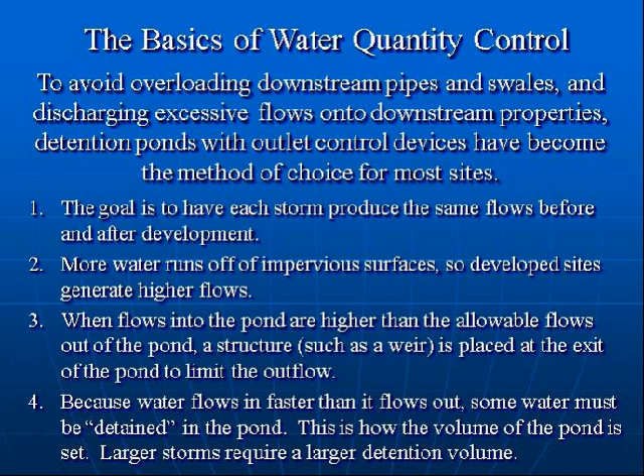So when water flows into a pond at higher than the allowable flow, the flow out has to be controlled, usually through a weir. It's placed at the exit to limit the outflow. Obviously, since water is flowing in faster than it flows out, you have to detain some of the water or store it in a pond to achieve the detention of water on a site so that the flows off site can be maintained.

Well, most engineers and hydrologists agree that about 95% of the water that falls on impervious surfaces will run off. Now, this absolutely is not true in a small, light rainfall in the summertime that's falling on hot asphalt. But overall, over the course of the year, engineers like to use a 0.95, which is 95%, or a 0.9 runoff factor for impervious surfaces. On landscaped areas that are developed, it's possible to get less than 50% runoff.

Lots of engineers like to use 30 or 35%. But by the time you compact soils and there's a relatively thin layer of manufactured soil underneath them, usually it's good to assume about 50% runs off. Now, in an undisturbed forest land, only about 20% of the water runs off. Sometimes it can be a lot less, depending on the type of land. And that runoff usually only occurs after the ground is saturated, because the leaf canopy and the organics on the floor can absorb some of that water.

Now, these are just general numbers, but they're useful for our discussion here to talk about why we need to control water quantity. So if an inch of rain falls in a forest, let's just say about 2/10 of an inch runs off. When you make that forest land pavement or rooftop, almost all of it runs off, which is about 5 times as much quantity, not rate of flow, quantity. Even in landscaped areas, it's 2 to 2.5 times the runoff as it was when the land was forested, let's say.

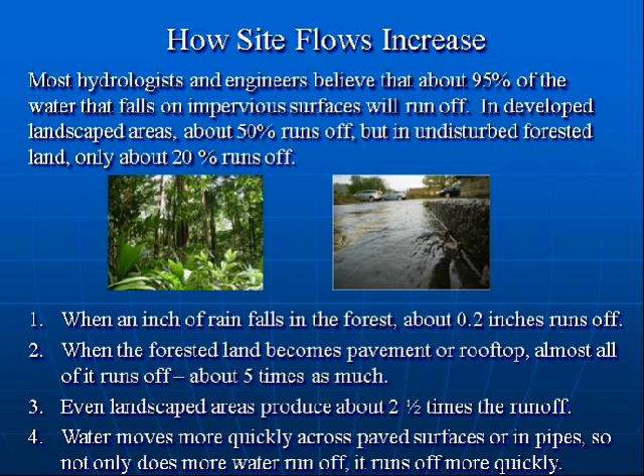Now, the other factor is that water moves more quickly in general across paved surfaces or in a pipe. So not only do you get more water running off, you get it faster. The water runs off faster and peaks sooner.

So this helps match pre-development flows. Usually a jurisdiction will say you need to match the 2-year, the 5-year, the 10-year. They pick some storms that they want to see the flows matched and kind of test your system to see if in various types of rainfalls the rate of flow, not quantity, this is the rate of flow in cubic feet per second, to see if you can match that flow coming off the site.

Well, a V-notch is a nice little tool, because obviously lower flows mean less detention, and less detention is a lower profile here on the weir, and so this can be used to match small storms and larger storms. Now, engineers use weirs, broad-crested weirs, sharp-crested weirs, Ogee weirs, circular orifices, all sorts of techniques to try to tune their release of water so that it remains the same.

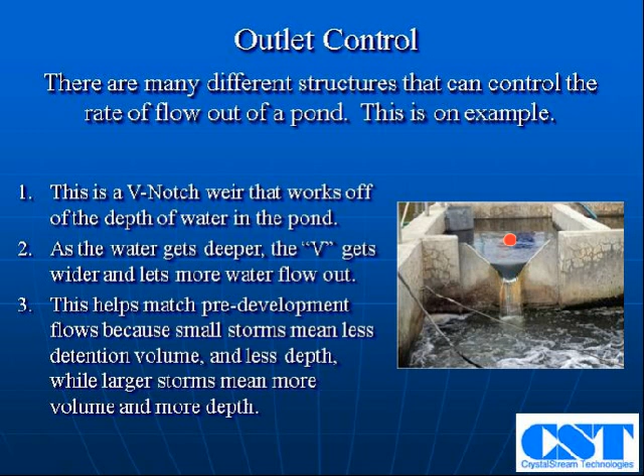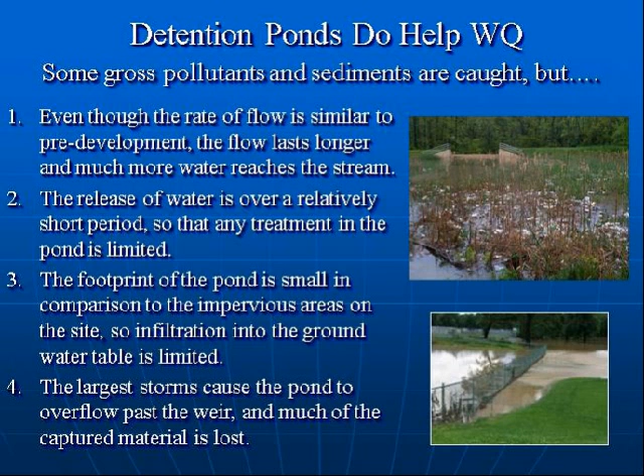One of the effects we found by putting devices below ponds, which is actually not where they belong, is that we still get a lot of material in our devices below the pond, and it's because when that pond does go to an overflow or gets into a large storm, it's pretty violent. The flows and the turbulence inside the pond are pretty violent, so we see a lot of material that gets washed out.

And that's not to say detention is not a good practice. In fact, it's hard to find a jurisdiction that does not require detention. There are very few exceptions to detaining the water, and it is justified to protect nearby properties. And you'll have downstream pipe systems that were sized for the existing flow, and so if you increase the rate of flow, you would overload the pipe system or the swales or ditches.

So, you really can't address water quantity problems with a detention pond. The quantity of water that runs off is exactly the same, pond or no pond. It just runs off more slowly. As a larger percentage of the property is developed across a watershed, these ponds peak and release at different times, and so more and more water reaches the stream.

As an engineer, we've spent a lot of time justifying the fact that at the 10-year storm or at the 5-year storm, at some particular point in time, we are not increasing the flooding on a stream at that point. But if everybody's releasing 3 to 5 times as much water into the stream in a watershed, you can bet that stream's going to receive more water overall during a storm event.

While the pre-development flows were smaller, they also took longer to reach the stream. And base flows from groundwater tables maintained some flows even during periods of little rainfall. You see this a lot up in the mountains. Sometimes I've seen springs in the mountains where there's so little mountain above the spring, I wonder how that flow is maintained even during the driest months. But there's a tremendous amount of storage capacity in soils, and water moves very slowly through this system.

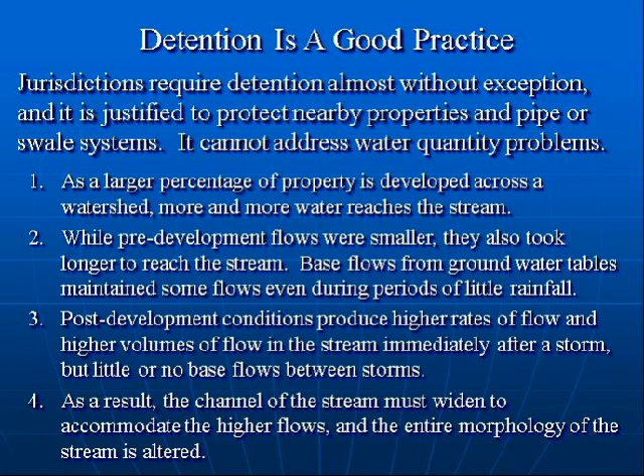As a result of these activities, the channel of the stream must widen to accommodate the higher flows. And so the whole morphology of the stream changes over time. If you work with some of the stream experts who are looking at channel bank erosion and at the outside curves of streams, they get pretty good at being able to estimate the amount of impervious in a basin just from the change in morphology on these streams.

So, the question is, when we're doing our water quality efforts, how can we help the water quantity problem? Well, even if we treat the water coming off of a site prior to detention to an extremely high level of quality, we use a separator, we use a filter, we would not help the quantity problem at all. The channel banks would still erode. The excess water going to the stream would still be there, and we would not have the groundwater recharge that we're looking for.

So, although this presents large engineering problems and some complexity in the design of a system, the first goal of a water quality plan must be to limit the flows of water off of the site, because that uncontrollable extra water that gets into a stream channel happens off of a site, can't be measured at the outflow point of a site, but it's a definite impact on the basin. Well, the best way that we know today to do that is through infiltration on the site or reuse on the site. And both of these techniques require some attention and some complexity.

If infiltration is possible, and that's one of the first levels of complexity, there's a lot of areas where infiltration is very slow and some areas where it's not possible at all. But if it is possible, it will help support the water table and stream base flows. Reuse for irrigation can also support infiltration to the groundwater below landscaped areas.

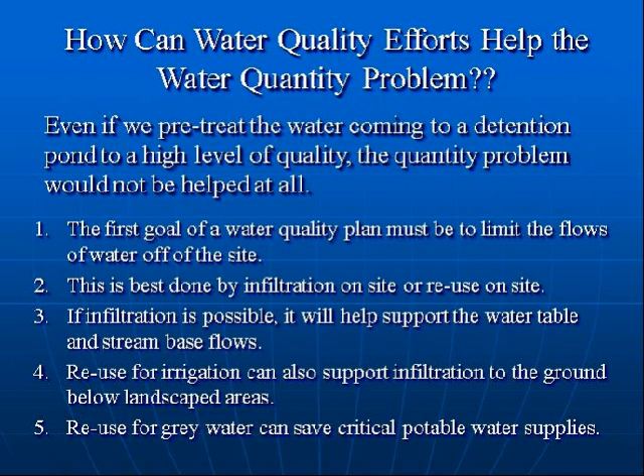And so a lot of times when we're looking at the complexity of getting a reuse system in place, we're not necessarily paying close attention to what may be saved in potable water supplies. So there's a positive effect there too.

Well, there's the challenges to this. I was speaking today with Earl Duckett, he's in the room here, and it's always good to have these holistic, overreaching ideas about, gosh, let's let less water flow off the site. Well, what are the challenges about on-site reuse or infiltration? Well, stormwater is dirty. We know that because we maintain almost 500 devices, and we've done over 5,000 clean-out operations,

and I had a report yesterday in the winter time from Highlands, North Carolina, very cold up there, of a live snake and a live bullfrog inside our device at Highlands. And it was interesting to me that they understood pretty well that it was cold outside and that the soil is still at 18 degrees Celsius or so up there, 60-ish, 65-ish inside our device, and they had found a warm spot literally to take up residence.

But stormwater is dirty, and by the way, our cleaner told the city folks that were up there to observe the cleaning that, hey, this just shows how good we clean up stormwater, and I thought it was kind of nice. Second thing is the challenge is rainfall is chaotic.

You just don't know. We have average yearly rainfall in Atlanta, 85 events a year, somewhere around 50 inches of rain if you look at the last 30 years, somewhere around 54 if you look at the last 50 years. You can do some predicting when you get to 30-year periods or 50-year periods. But really predicting, even in a storm you know is coming, the intensities and the depth of rainfall can vary widely just a few blocks apart.

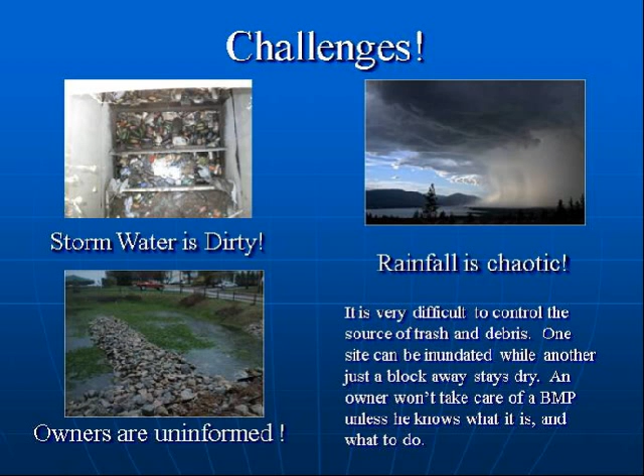So these challenges exist. If we're going to do something that's more complex than putting water in a pipe, putting it in a pond, that hopefully, in the old days, we would design so it wouldn't silt out, a pond that's going to be 10 years for maintenance or 5 years or 20 years, we just push the problem downstream. If we're going to do something more complex than that, we've got to go after these challenges.

Infiltration and reuse systems: every one of them has a very similar need. This includes manufactured filters. It includes cisterns. It includes distribution systems for landscape irrigation or into a toilet system, let's say, for flushing in a building. All the water that comes to these reuse systems should be free of excessive sediments and gross pollutants. You just can't deal with Dixie cups in a lawn sprinkler system.

So step one is to be sure that the gross pollutants and sediments have been removed from this water, and this is something that's been shown to be very easy to control. There are a lot of systems out there, mostly manufactured, but there are good sediment forebays and trash screens that have been able to control this type of material getting downstream.

A manufactured device, for example, may look something like this bottom picture down here, nothing more than a manhole or two on the site. So the impact for land use is very, very small. And this could be true of a public domain vault in the ground that was settling out sediments. It doesn't have to be a proprietary manufactured system. But one of the things I keep in mind is that every pond out there has been manufactured.

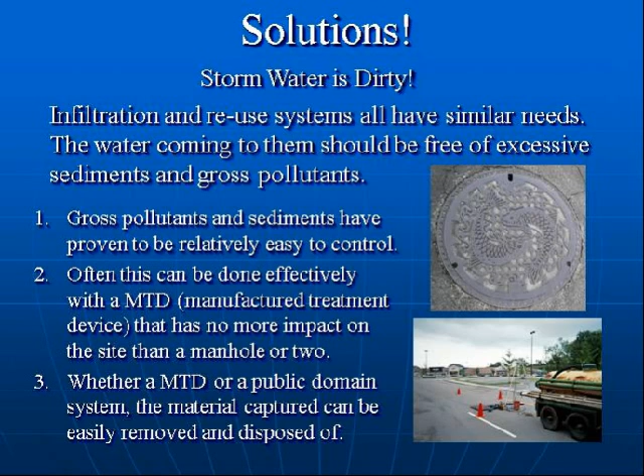Now, when you build a manufactured system and you try to get it approved, the first word out of a regulator's mouth, and it should be, is, hey, how are you going to get that thing clean? What does it cost? How often do you have to clean it? What's going to happen if it doesn't get clean? Those questions should be asked for every BMP, but when we talk about dirty water and getting it clean so it can be reused, these are the types of systems that you need up front to pre-treat this stuff.

The problem of chaotic rainfall is certainly not one we're going to solve, but one of the problems with infiltration is that it's very slow. We can design sand filters that will infiltrate relatively fast compared to regular soil. But no matter what the system is, compared to a 36-inch pipe going through a pond, it's awful slow. And that's something we have to deal with when we're looking for solutions.

Bioretention has limited storage before it overflows. Reuse systems have to hold enough water to provide for irrigation or other uses. One of the problems with irrigation cisterns is when it's raining, which is when you get your water, you don't need your water because it's raining. So you have to store that water. You may have to dispose of some water when you have a large storm coming and your cistern's already full.

So all of these problems of the chaotic nature of rainfall have to be addressed when you're dealing with this type of a system. Large storms can be a problem for infiltration or bioretention. So you want to have overflow from these systems that can be redirected to a reuse facility or detention.

Now, reuse can be a problem because of invert. We always talk about water. Everybody understands water goes downhill. Detention, it's pretty easy to get this water to a detention system, which is usually the low point on the site. Very few stormwater systems pump water up to detention. So planning in advance for overflow from infiltration or bioretention, what are you going to do with the water if it overflows?

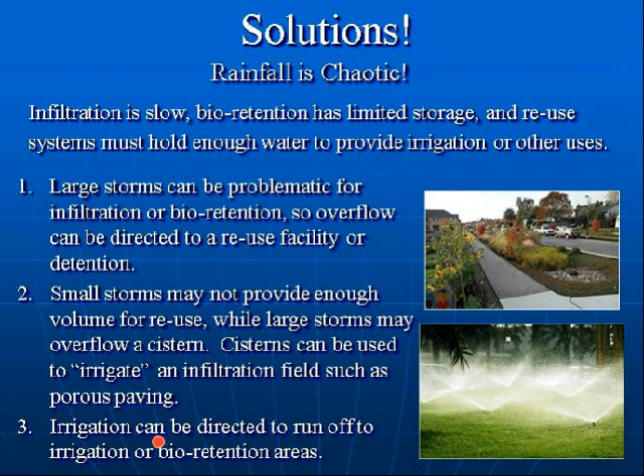How much is enough? In most areas, if we talk about a 1-inch first flush rainfall depth, it'll account for about 80 to 90% of the rain that falls every year. Now, if you go do the math, and being a curious person, I did that. I took all the storms for the last 60 years in Atlanta, 1 inch and below, and I added them up to see the total rainfall depth over that period of time and the depth of those storms, and it was only about 65% of the storms amount to this 1 inch or smaller storms.

And being a flow-based device, it bothered me that we weren't quite getting 80 to 90% of the rainfall that falls. What I missed in that was every storm that's larger than 1 inch, if you're a volume-based pond, well, you're going to get the first inch of that storm. So if it's a 1.5 inch storm, you get the first inch. When you add those storms into the mix, and by the way, you can add them into the mix for the rising limb of a hydrograph, 1.5 inch storm, a flow-based device is going to treat a good portion of that as the flow builds. So that's how you come up to the 80 or 90%.

If any of you guys are trying to do the math, which is casual, so to speak, if you're trying to meet a permit, but when you're trying to fill a cistern and estimate the amount of water you need to maintain landscape, it's no longer casual. You need to have a real good handle on the distribution of the rainfall and what you're going to get and what months of the year you're going to get it and when you're going to need to irrigate. So keep that in mind as you're starting to sum up these storms.

Well, if forested land only has about 20% runoff, that means if you catch the 1 inch storm, you could match the existing volume of runoff. What I'm saying here is, let's say we catch the 1 inch first flush, and in Charlotte, North Carolina, it's 80% of the rainfall that year. Well, that means 20% of the rainfall would run off, which is about what we had when we had forest on the land before. Now, the flow patterns would be different.

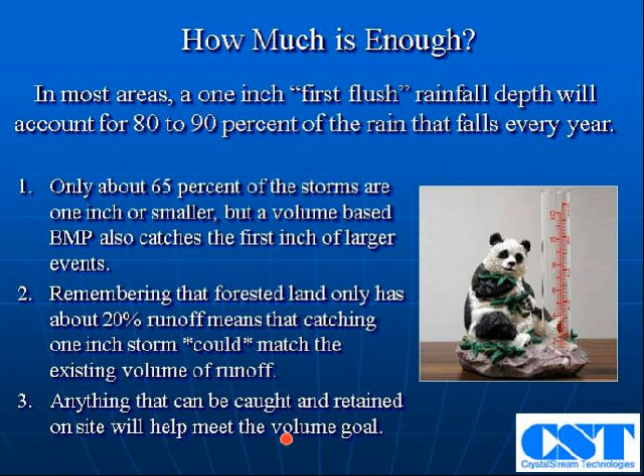When you're thinking about the cost of building a pond, the size of building a pond, the depth of the pond, the cost of the outlet control structure, the size of your pipes, there are savings that cascade back upstream over the fact that you've handled some of your volume. In fact, you may find that you meet your 1, 5, and 10-year storm release requirements because you're capturing a certain amount of that water and keeping it on site. Well, there's some simple steps that can be effective to help you do this sort of thing.

On a tough commercial site, and that's what I was talking about, the rooftop is sometimes 30 to 50% of the impervious surface on site. This water is essentially clean and doesn't need pretreatment. Now, I know if you've got a dentist office with oak trees over the whole roof, you've got leaves in the gutter, but thinking more of your more typical commercial sites, this water is essentially clean. It doesn't need pretreatment, so you're not going to spend a lot of money with a manufactured device or a filtration device or something to clean that water up.

You can use that to fill a cistern for irrigation, or for wash down, or for other purposes where you would normally be buying water from the city to accomplish that task, drinking water essentially. It can save some expensive potable water. Here in the east, we're blessed with a lot of water. When I went to Utah complaining about the fact we were in a drought, we'd only had 35 inches of rain 2 years ago, they were laughing because they get 17 inches of rain, I think 7 inches of which comes in the form of snow melt, and our drought would have been their flood.

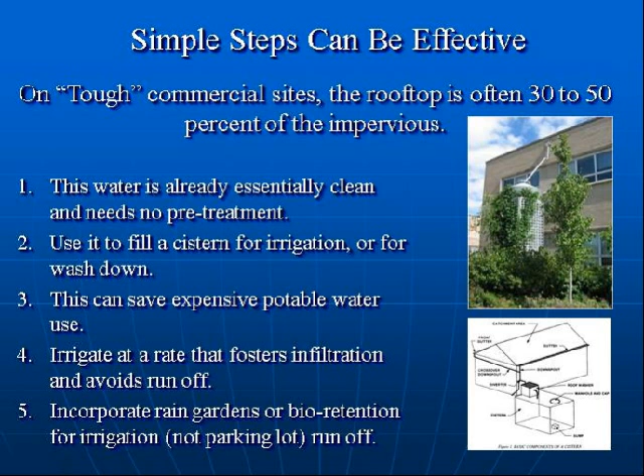And you can incorporate rain gardens or bioretention for irrigation, not parking lot runoff. What I'm saying here is some of these things make no sense when they're connected up to a parking lot with 1,200 automobile trips a day, like a gas convenience operation. Putting a bioretention or rain garden out there, to me, is just irresponsible. It's going to be dirty. It's going to be nasty. It's going to be a mess. It's going to smell bad. It's going to be full of oil and grease, and it's just not smart. But if you had, let's say, slopes that sloped away from your parking lot and a swale at the bottom that you could have a slow release on, this might be just a perfect place to get in some rain garden or bioretention. Water quality points, save some money, and actually do some good for the environment.

Owners are uninformed, and this is a monster problem. I think everybody's starting to realize it today. But in our experience, and now I'm talking about my cleaning and maintenance company, most owners have no idea the function of any BMP that they have on their site. You can't find manuals. Properties where we give the owner a manual and go back in a year, the manuals are nowhere to be found. We've done our education at property turnover. We've done everything we can. We're trying to push them and guide them into maintenance because we're in that business. But in general, if someone like us isn't staying at this all the time, these owners certainly don't have manuals and resources to guide them into how to properly maintain and keep up ponds and sand filters and everything.

Every BMP should have a manual that shows proper care and maintenance. Maintenance procedures and costs should be disclosed at the issuance of a permit. Engineers in the group here today, I say at the time of a permit, you should be sitting down with your owner and say, look, here's the responsibilities going forward you're going to have for water quality. Here's what we know are the permits and regulations today, and here's what you're going to need to do, and here's the cost. We can save some money up front and do this, and it's going to cost you some money in maintenance down the line. But you really should disclose what those maintenance procedures and costs are before you put a BMP out there on the site.

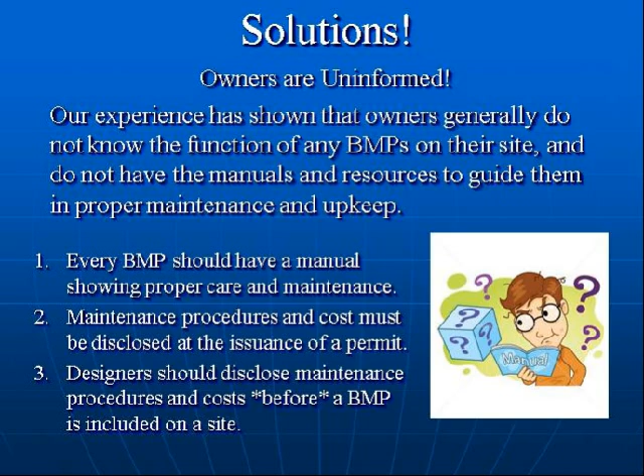And I think all of us know this, and I could be really critical of engineers and designers, but I know we've been diligent every single time, and we've had a horrible success rate overall for implementing maintenance on BMPs.

You know, it's not necessary. Jurisdictions can help with this. You don't have to have an army of BMP police to enforce maintenance. Similar to the programs on double detector checks that have to be inspected yearly to avoid contaminated water flowing back out of a sprinkler system or a local fire protection system into the potable water.

Owners can self-verify at a proper maintenance or inspection interval if they know what to do. And you can have simple records like disposal manifests or receipts for services with some digital pictures to verify compliance. We're actually doing this in some areas now. Provide a log sheet for the owner at each maintenance interval. You know, 6 months inspection on his pond, or a 90-day inspection.

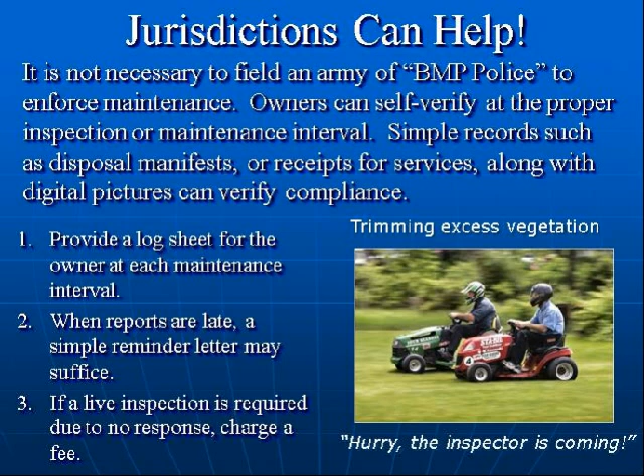When reports are late, a simple reminder from a jurisdiction may suffice to get an owner to get his work done. And if a live inspection is required, charge a fee. So this is my little picture here of trimming a pond with the inspectors coming, and I've literally seen this occur where landscapers are hired at the last minute to try to make a pond look good because someone's gotten a violation and the inspector's coming back.

You really should have a checklist, something like this. This is our checklist for our device. When we don't have a device under cleaning and maintenance, we certainly can provide this to the owner. We have a 5-year warranty on our machine if it's cleaned, and this can serve as a reminder to the owner that there's some things he's supposed to be doing.

This is a manifest. This is a nice piece of paperwork because the generator signs that he generated it and you picked it up at his place. Transporter signs that he transported it to a disposal facility, and then the disposal facility signs that it was disposed of properly, and there's a receipt for the gallons and the money, etc.

And things like this can make it easy for an owner to comply. You know, he could send a county or a city our checklist, our manifest, and a receipt for what he paid, and he's in compliance for another year, another 6 months.

It's a fact that without a good program, BMPs are going to fail, and especially what we're talking about here. If you're trying to address water quantity with some infiltration and reuse, you're not going to have a system that's going to function unless somebody understands each element and how it's supposed to be done. It doesn't have to be overcomplicated, but it's pretty simple to inspect and keep these systems functioning when you're paying attention. We try to make it easy. We want to encourage owners to maintain their BMPs.

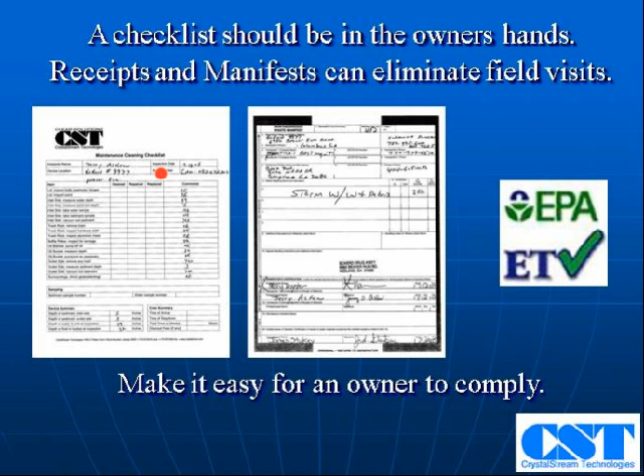We try to sell maintenance, but I'd have to give us an F on our report card, because right at 1/3 of our devices are on active maintenance, and it's to my benefit to get these guys on maintenance for several reasons. Number one, the machine is doing what it's supposed to do and what I sold it to do. Secondly, I make money, which is good. It's not a monstrously good business, but it is a solid, steady business. It's not as much fun as designing and getting patents, but it's certainly a piece that needs to be done.

And thirdly, the jurisdiction has some confidence that what we all conceived of, the regulations we wrote, the plans we filed, are actually happening. Well, with a concerted effort in my own interest here, we still only are successful 1/3 of the time.

Over time, if no communications come from the jurisdiction, owners will quit. We've got some people now that are coming back on maintenance for their 3rd time, and that means they've had 2 NOVs. When they get a notice of violation, then the inspector comes out, they'll get back on maintenance. It's tough, but that's kind of the way life is. So we have to understand that, unless there's a good program for enforcement, even if it's a friendly enforcement program.

So we also call jurisdictions to get a request for BMP locations. My guy will go out and offer to clean the pond, clean the swale, clean the competitor's device. You'd be surprised how many jurisdictions have no idea where their BMPs are. They offer to give you the key to the plan room. You can go look through them and see what you can find. And they certainly don't have a program for inspections.

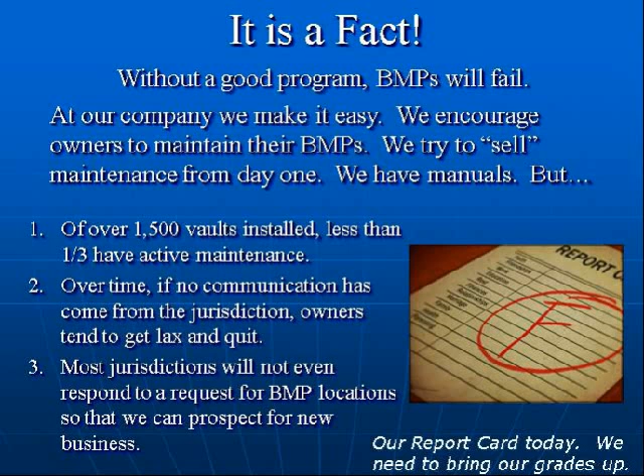Now, to be fair to the jurisdictions, inspections during construction are scheduled, programmed, and there's a whole program of when your next inspection comes. You get this done, you call the electrical inspector, or you're going to get a soil and erosion inspection every 2 weeks. But post-construction, most all inspections in the county are driven by complaints. So essentially, if it's in the ground, out of sight, out of mind, the pond's not overflowing, and there's not shopping carts going down the creek, you're not going to see an inspection for water quality.

So here's kind of a recap of actually accomplishing water quantity with water quality. Okay.

Step one is to address runoff volume first, retain and reuse. Is that going to work on every site? No way. Maybe it only works 50% of the time. Maybe it only works 30% of the time, depending on the type of sites that you have. A scrape and rebuild downtown, kind of tough to retain and reuse.

Certainly, if you've got a wall-to-wall building and a 4-foot sidewalk or a 6-foot sidewalk in front, you're not going to be doing much. But on the other hand, if you realize that this may save your owner some money in the long run, may cut down the size of your pond and get you a better yield out of your property, more parking, more building, something to consider, because the cost of that land is very high. And so look at runoff volume first, see what you might be able to do.

Limit the exposure of relatively clean water to hard surfaces. Sometimes they need to put downspouts out onto pavement, not always. There's good reason to pipe water on a site to control it so we don't get erosion and high maintenance later on. In other words, we prefer pipes over swales a lot of times as engineers, because once it's in the pipe, it's good. Not such a bad idea.

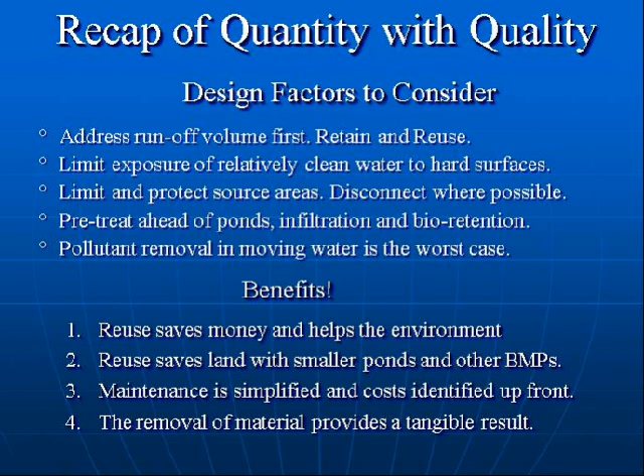We had taken 1.2 million pounds of material out of devices they had approved for us within their jurisdiction. And so we have a little plaque and a ceremony, and we go up and explain to them how good they've done. We just put Elizabethton, Tennessee into the 50-ton club this year, a smaller city with less devices. But this tangible removal material that shows how many thousands of pounds of material that was going to go to the streams and rivers is a tangible result. This actually gets jurisdictions and it gets owners fired up to try to do some water quality.

So if you're remembering that removing pollutants from running water is the worst case, and it's tough, every gram of pollutants that don't enter the water makes the job easier, and you can control your sources. I'm not an expert at source control, but there are a lot of things that can be done. Roof materials, types of paving materials, other things that can help control the source of pollutants that are going to get in the water. All the water retained on the site, of course, reduces the rate of flow and the duration of flow, and that really helps in stream bank protection. And I think most of you guys have seen more and more jurisdictions are requiring retention or reduction of quantity for stream bank or channel bank protection, is what most of them call it.

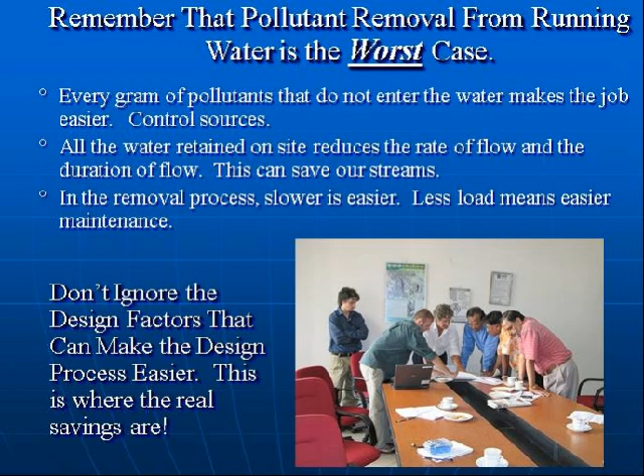In the removal process, if we are having to remove pollutants, slower is easier. So the less load we get and the less flow we get, the more successful we can be at using mechanics, using gravity, using flotation, using centripetal force to remove pollutants from stormwater. So you don't ignore the design factors that can make the process easier, because this is where your real savings are.

You got to remember always to pre-treat ahead of ponds, infiltration, and bioretention. There is no mechanical separator like my crystal stream device. We have a polisher too, but a mechanical separator, a gravity separator, cannot remove salt out of salt water. Can't deal with dissolved chemicals. So these BMPs, ponds and infiltration, bioretention, can do things that a mechanical separator cannot. But it's almost like there's a divide down the middle. The ones that can handle the dissolved chemicals and the nutrients cannot handle trash and debris and oil and sediments. So these ponds are very difficult to maintain.

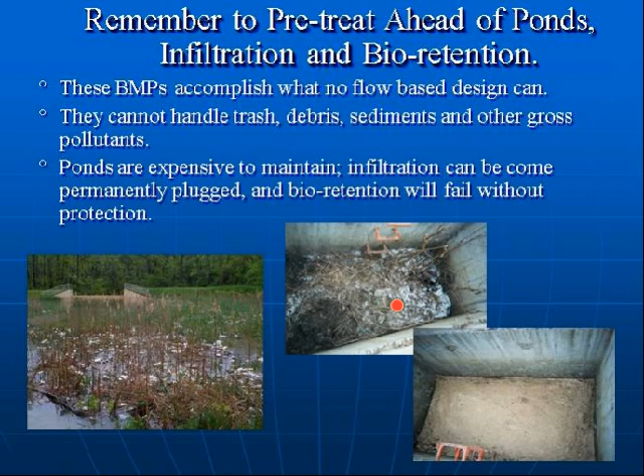Infiltration, this is an infiltration system. Sand filter is just practically destroyed, not working. They will fail without some protection. So that's something to keep in mind if you're going to do this. Well, if you aggressively design for water quantity from the beginning on your site, you may find that your water quality needs have just about gone away, that you have accomplished water quality simply by addressing the quantity issues up front. No runoff for a subset of storms means there's no pollution leaving the property for those storms.

One of the odd things that happened as LID was being evaluated in the early days, in the late 90s and early 2000s, by the Center for Watershed Protection, is the effluent quality went down. In other words, the water got worse on the subdivisions that were practicing LID. There were higher concentrations, and the reason was there was less runoff. Overall, there was a lot less pollutants. In other words, if 1 pound ran off before in 10,000 cubic feet of water, that was a low concentration. Later, a half a pound ran off in 1,000 cubic feet of water, so the concentration went up, but the total net volume of pollutants going off the property went down. So every time you can cut the pollution down to zero for a storm, it obviously goes toward your favor in the percentage of reduction.

Some people have asked me, how do you get 65% removal of phosphorus? Well, only flow 30% or 40% of the water off your property. You can show some level of reduction there, but 60% of your phosphorus never got a chance to leave the property. And mechanically, it's hard to get 65%. By absorption, it's hard to get 65%, but you can make a solid case by reducing the volume of water and not allowing it to leave the property that you've reduced some empirical amount of pollutants. A detention does not address water quantity at all, but you can reduce the size of your detention pond, obviously, by volumetric treatment, by quantity treatment.

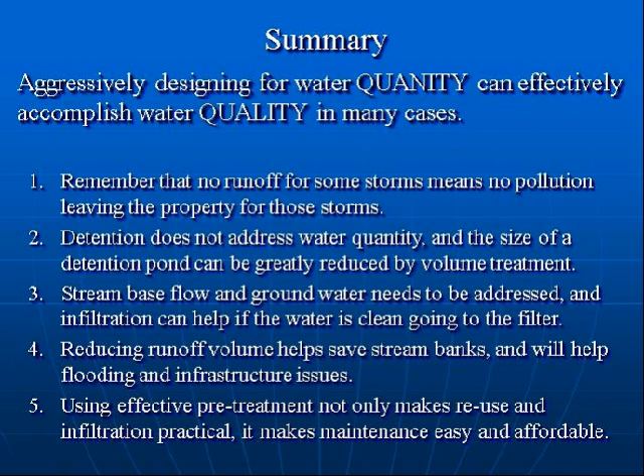And using effective pretreatment not only makes reuse and infiltration practical, it makes maintenance easy and affordable. And remember, without maintenance, this kind of approach is absolutely doomed. Some people have said it's time for low-impact development. And you know what? It's going to be time for low-impact development. We've got to be careful how we implement it from a stormwater side. There's other things to low-impact development; I know it's not just a stormwater issue. But if we're going to address the stormwater issues, it can be done. And we are now getting to the place where we have the technology and the intelligence to apply these systems and make them sustainable over time.